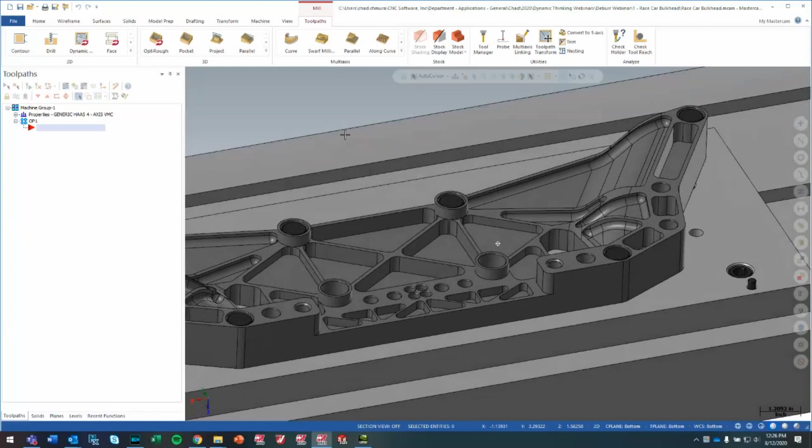This is a race car bulkhead for rear suspension of a race car. So this part is kind of a lightweight airframe structured part where naturally there's going to be a lot of sharp edges that need to be deburred at the end of this process. And deburring really any part, it's time consuming. It's a leading cause of scrap.

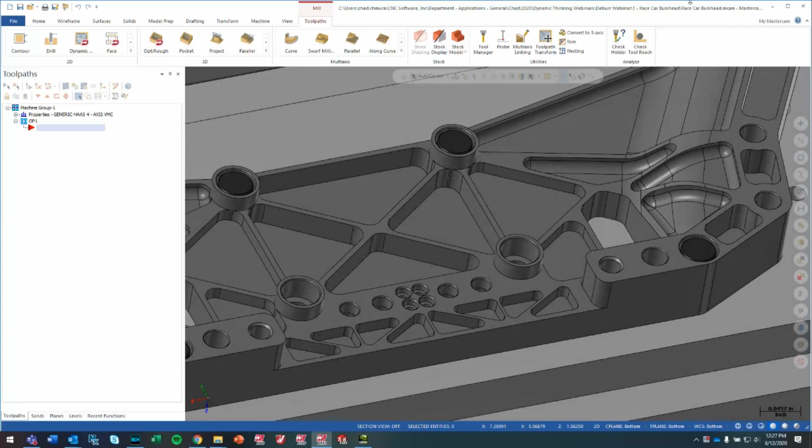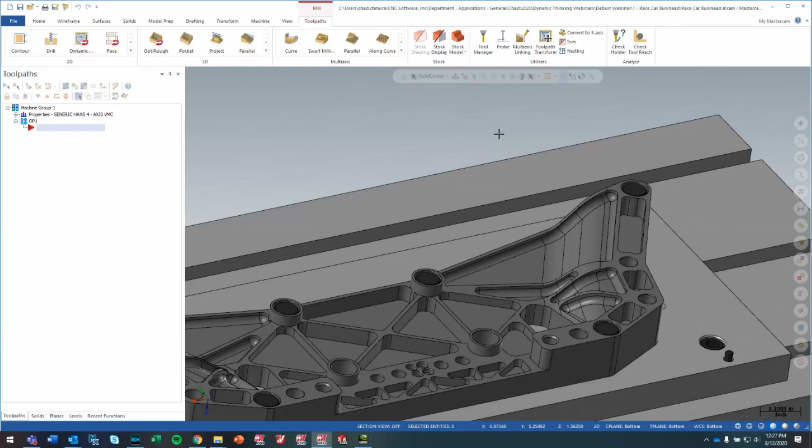Anytime you have a human hand touching a part, the human hand is going to be inconsistent. The break edges will be different each time. And depending on how bad the part is, deburring these parts could actually be just dangerous. These sharp edges are not something you really want to be rubbing your hands along if you don't need to. So what Mastercam Deburr offers is a solution for breaking these edges.

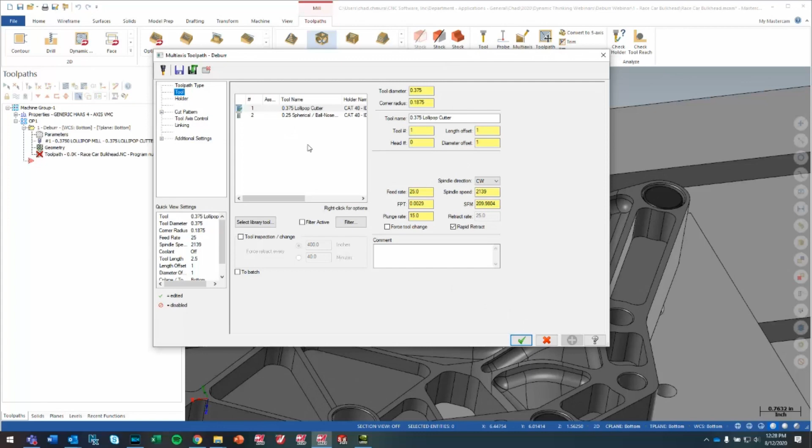So we'll build a quick Deburr toolpath just to show you what it's all about. So under the multi-axis drop down, there is the deburr. And what this toolpath is looking for is a spherical tool. So it needs to be a ball or a lollipop mill. We can't use a chamfer mill for this because that would be a chamfer as opposed to a deburr operation.

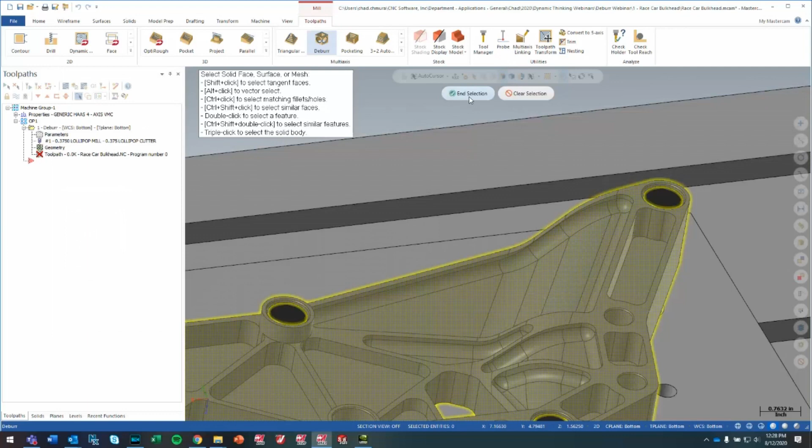The really cool thing about this toolpath is how little it requires to get going and how really complex the results can be. The first thing we have to do is select our part surfaces. So what I can just do is triple click to select the entire body and End Selection. And then by default, the Deburr toolpath is going to detect every sharp edge on this part.

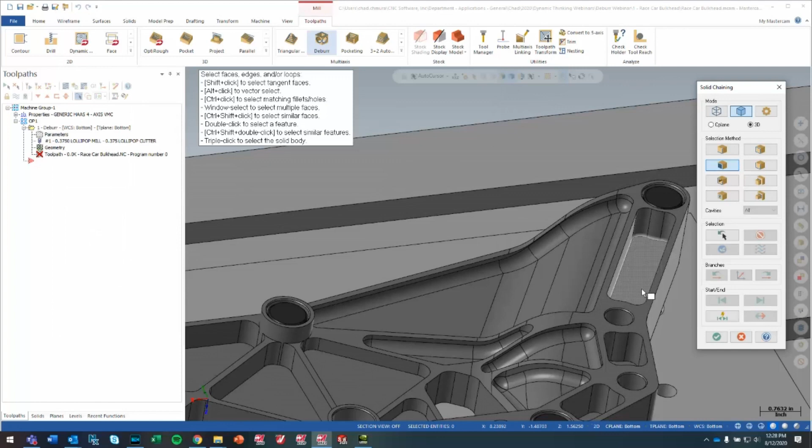And we have the option to exclude edges. So basically we say, oh, I don't want to deburr the edge where this bolt head is because we're not going to be able to reach that hole. So instead, for this case, we'll do a user-defined edge just so we can deburr one single edge. And if we just do a shift click here, we're going to get a chain that wraps around the entire length of this pocket. So this is a very simple pocket that needs to be deburred. So this is a very good first example.

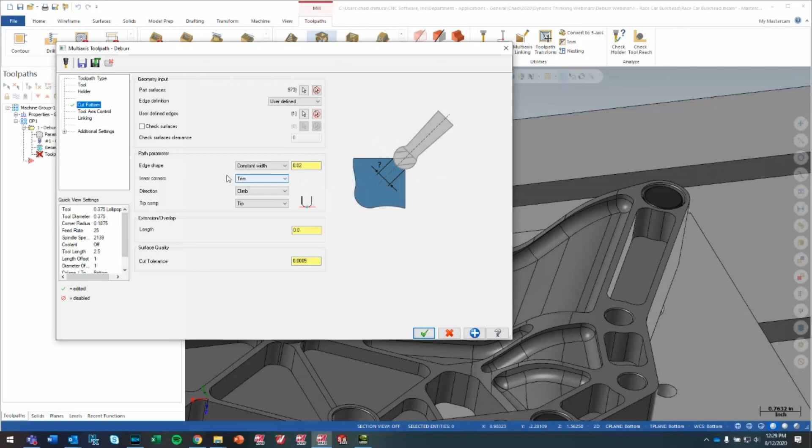We enter our width or our depth of the break edge that we're targeting here. So this is 20 thousandths, this is an inch part, so it's a pretty heavy break edge. The real power here is with tool axis control. So right now this is set up for a 3-axis machine. We have all sorts of options for running this with multi-axis machines.

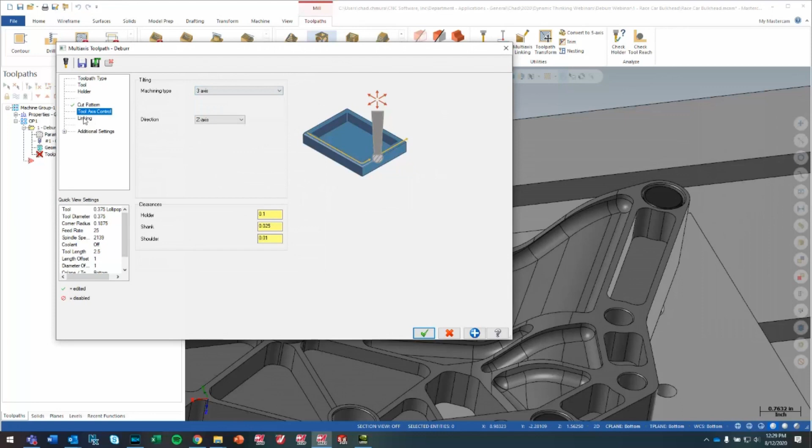And then finally, we have some options for setting up some linking parameters and things. But right now, we're just going to leave all this as entirely default. So let's generate this with the default parameters. So really, I only entered, and I didn't even enter it, I left it default, but the break edge size. All we had to do was select surfaces and edges to deburr.

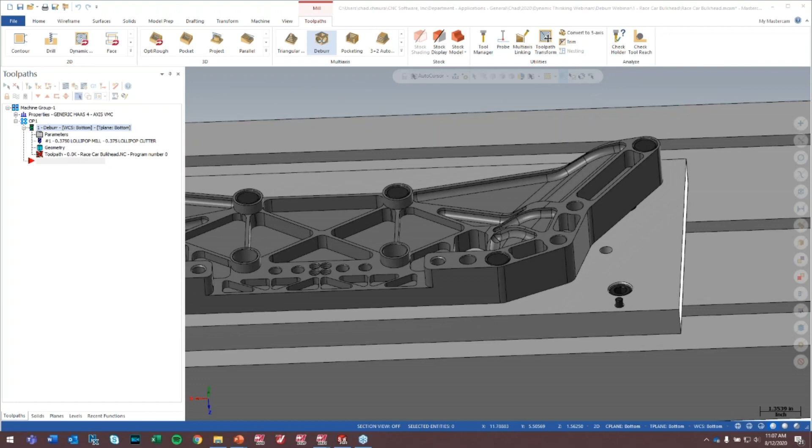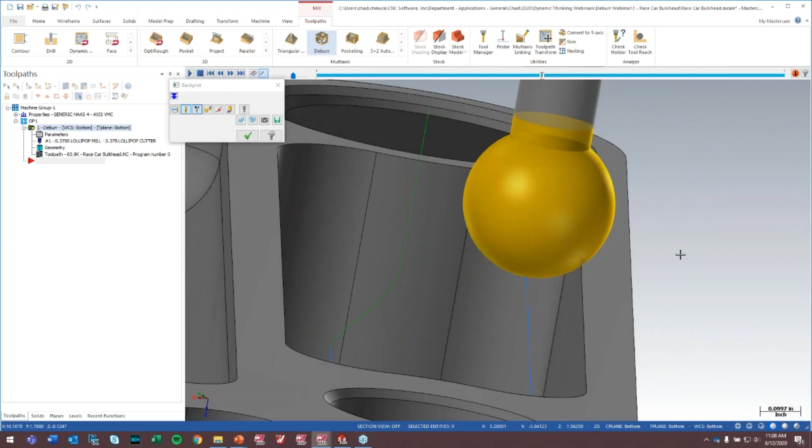So the point of selecting the surfaces is that this toolpath is consistently checked for collisions. And so what that means is that no matter what you do, you will not find a gouge in your part. You will just have a good deburr toolpath, super smooth, very predictable, and you will not gouge your part. As we'll see in one of these next passes that I create, this toolpath is intelligent enough to avoid any surfaces that are not requiring deburring.

So we can see here inside the tool that we're just taking a nice 20 thousandths break edge, and we come off the part and retract to our default linking parameters, which ended up a little bit high, but that's okay. We can dial that in as we go. And this right here you could have done with a simple 2-axis contour toolpath.

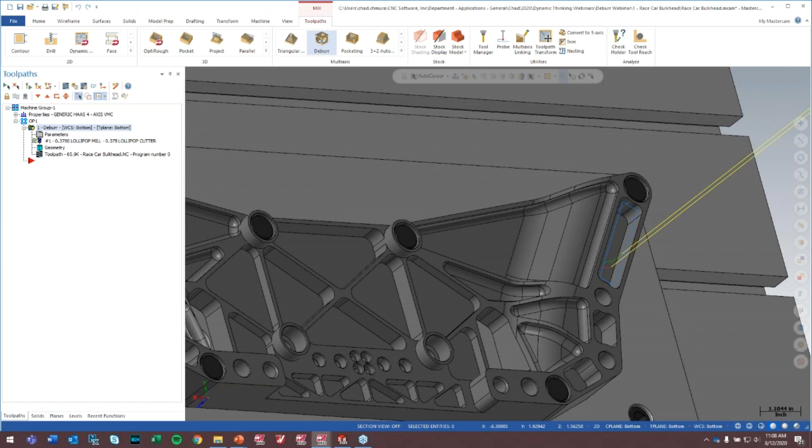If I just copy this toolpath down, just to save some time on selection, now let's do a different edge. Let's unselect this first edge. And now we'll select one that's a little bit more complicated. Again, shift click, we'll find all the tangent edges.

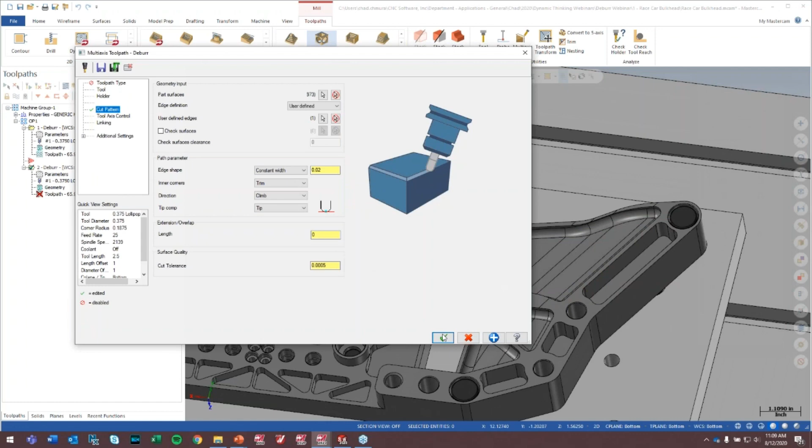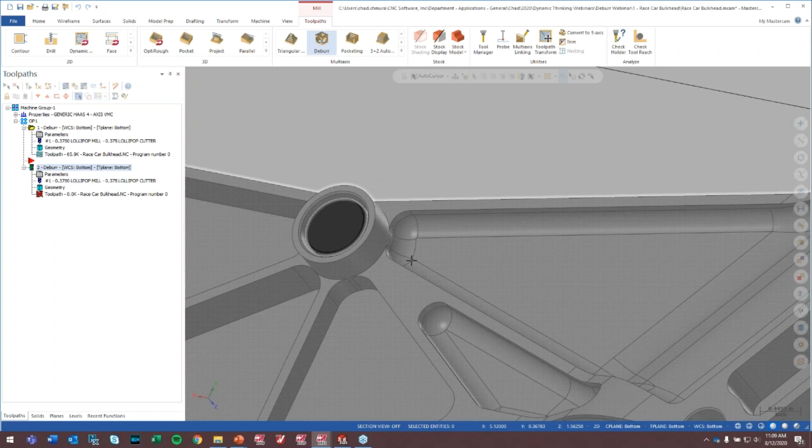And you'll note that this one is basically going to end tangent to a face that doesn't require a deburr, right? So this cylinder that sticks up is something that we don't want the tool to interfere with. So once this finishes generating here, and now this is still a 3-axis toolpath, and we're still using a lollipop mill.

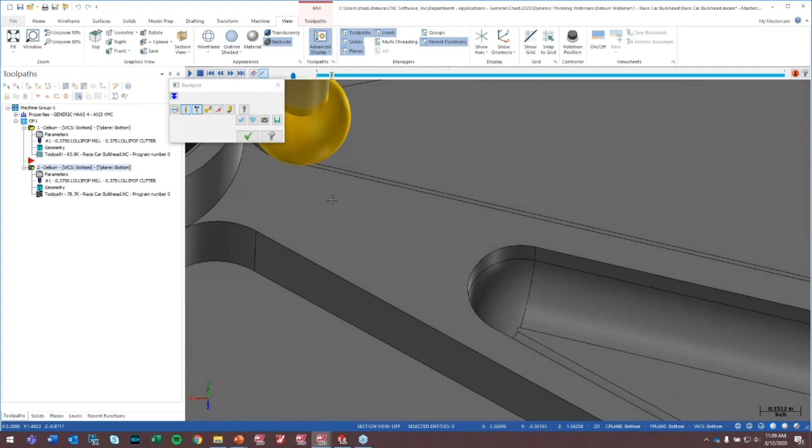So what we're going to do once this is done generating is change the tool up a little bit, just to show some of the collision checking capabilities that we have here. So this toolpath comes in, just misses that surface, and immediately gets into deburring. So now it's a 3-axis toolpath, right? So this is something that you couldn't really do with a contour as you approach over these more complicated edges here. And again, come off the part with a nice retract.

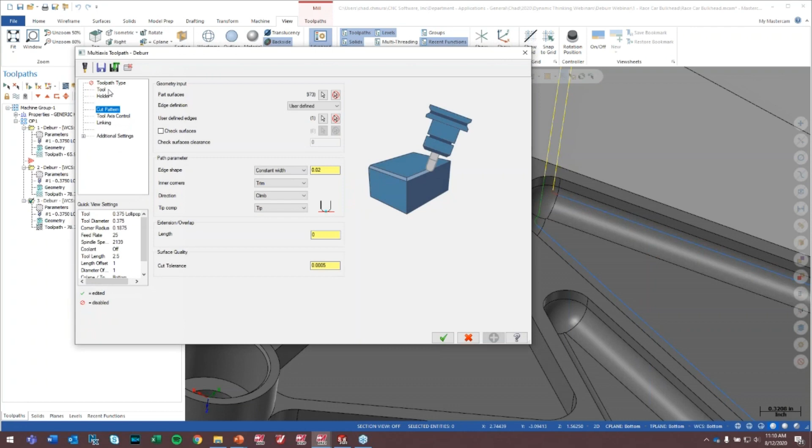And again, just for the sake of comparing, we'll copy one more time. Let's say we don't have a lollipop mill. Let's say we actually have this ball end mill, which has an increased shank diameter relative to the cutting diameter. Change that tool and leave everything else the same. What we're going to see is the shank of that tool needs to be collision checked against the cylinder that's standing up. So as we regenerate this toolpath, what we're looking for is that the shank of the cutter is going to miss this area.

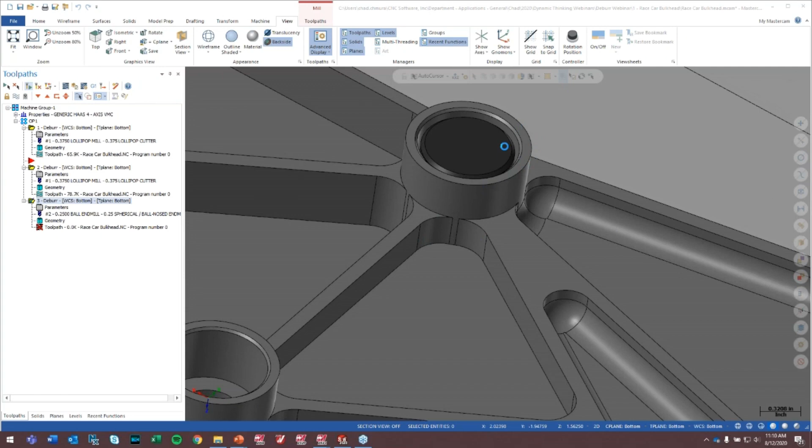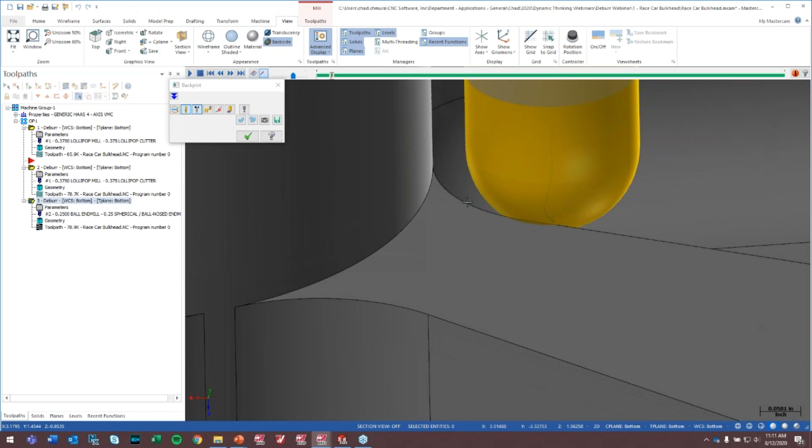And so while this is going, we'll mention the next step of this is that we are going to add a little bit of multi-axis tilt, because with an increased shank diameter, we need the tool to stay away from this feature, which means we're not able to deburr all the way to the end of this part, right? Right now we're obeying a value that was set in our toolpath, maybe something like 20 thousandths of an inch or so of a collision checking distance between the shank of the tool and the feature that stands up.

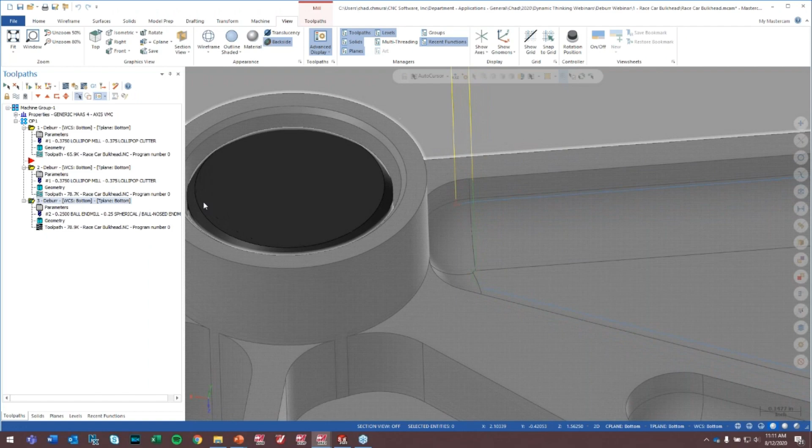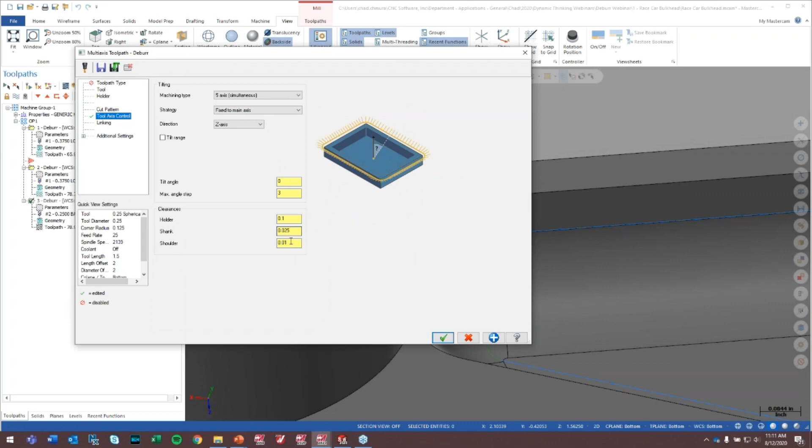And you can see the comparison between both of these toolpaths is that our new toolpath does not quite complete this break edge. So what we can do here is simply go into tool axis control if we have a machine that's capable of tilting, and switch to 5-axis mode. Right now we're going to keep the tool fixed to the main axis as long as possible. So this is going to make the tool stand up straight unless it has to tilt. Right now, as I mentioned, we have a 25 thousandths of an inch collision checking tolerance on the shank of the tool. So as this completes, we'll regenerate this.

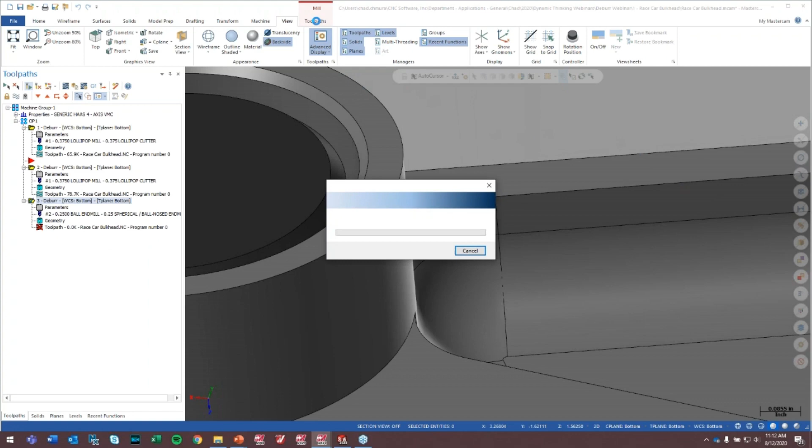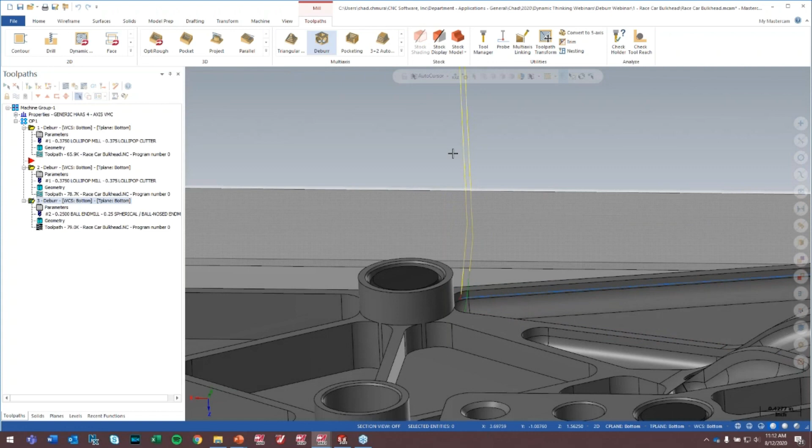It actually looks like we do have a question here. So we're inside of the multi-axis toolpath gallery here. The first question is, is this toolpath available for users who have a traditional mill license? And currently that is not possible. This toolpath, even though up until this one I've been running with a 3-axis tool axis control, is still a multi-axis toolpath that requires a multi-axis license to use. So it doesn't need to be run on a multi-axis machine, but your Mastercam license does need to be multi-axis.

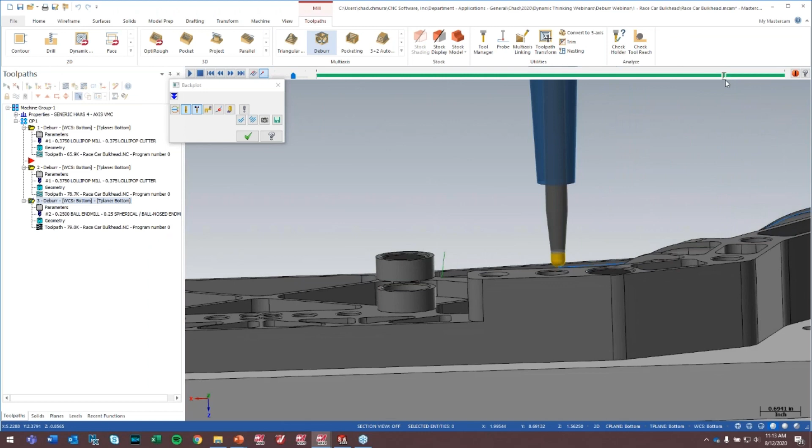So if we look at how this tool approaches now with 5-axis mode, we get our tilt, a nice approach that keeps the shank of the tool away from the feature, and then it returns to straight as soon as it can, because this is our main axis that we want to remain fixed to. And then finally, the tool kicks over so that it is able to reach the very end of this chamfer. So again, if you have a 5-axis machine, you're able to get the most out of this toolpath.

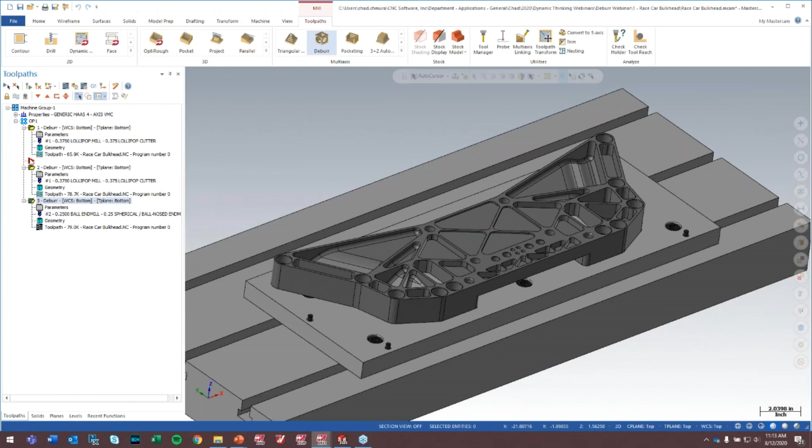Let's say, though, you don't have a 5-axis machine. So let's say here for our second operation, we flip the part over on the table, and we're now going to be using the top plane. Something that's really cool about the Deburr toolpath is the ability it has to create undercut deburrs. So now again, we'll go in with the lollipop tool, triple click to select the entire part. And just for example, we're going to say we want to define a single edge right here that we're going to deburr.

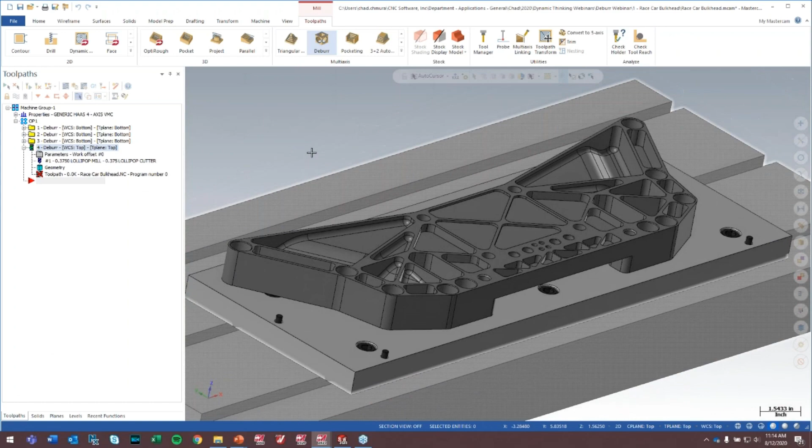And I should just make sure that this is going to run in 3-axis. A little bit too late, so we may see a multi-axis version first, which will still be entirely functional. But I just want to show the ability here of this toolpath to run with 3-axis undercutting, because for somebody who just has a 3-axis machine, deburring a feature like this from above was never really possible. Not that it wasn't possible, it took a lot more work than what we're about to see here.

So 3-axis, let's just do a quick regenerate on this. So that was a 5-axis toolpath, which meant it was doing a little bit of tilting. So that's something that we wanted to try to stay away from for this one specific case.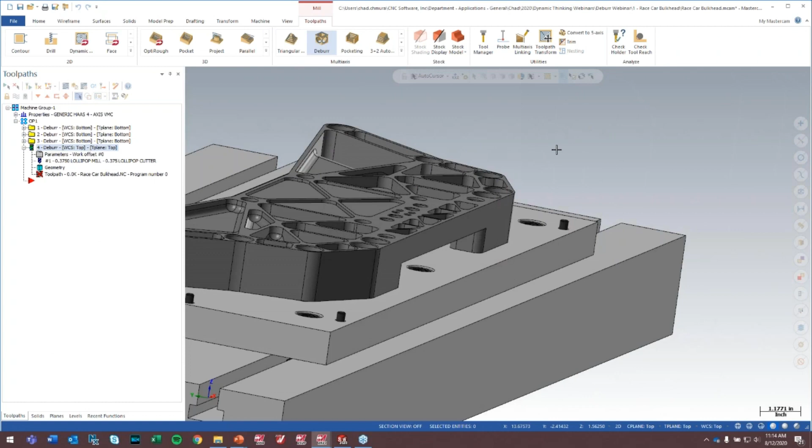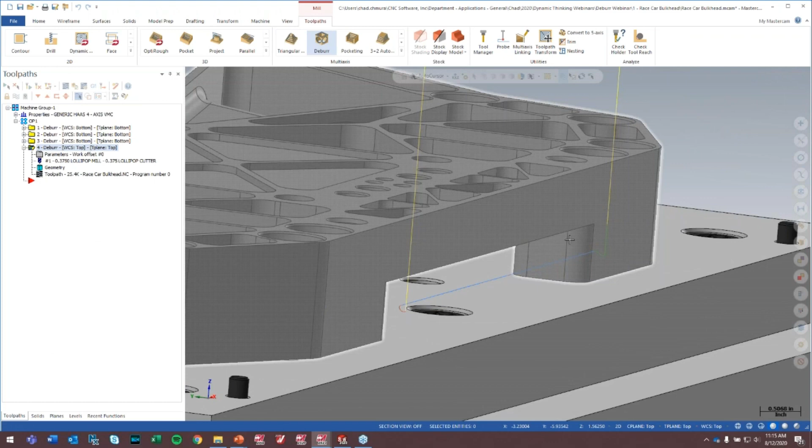So as this regenerates, one strategy that we could actually employ here, and the reason why this is taking so long to generate: selecting the entire body is maybe not the most optimal thing, because essentially that means that the tool is being collision checked against surfaces that are way out here. The really smart thing to do would be to select all the local surfaces. That way you collision check against surfaces that are nearby and save yourself a lot of time toolpath generation wise, not collision checking against unimportant surfaces.

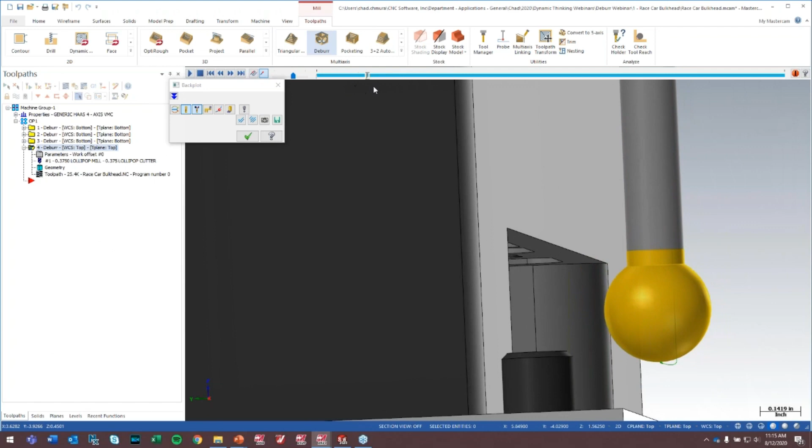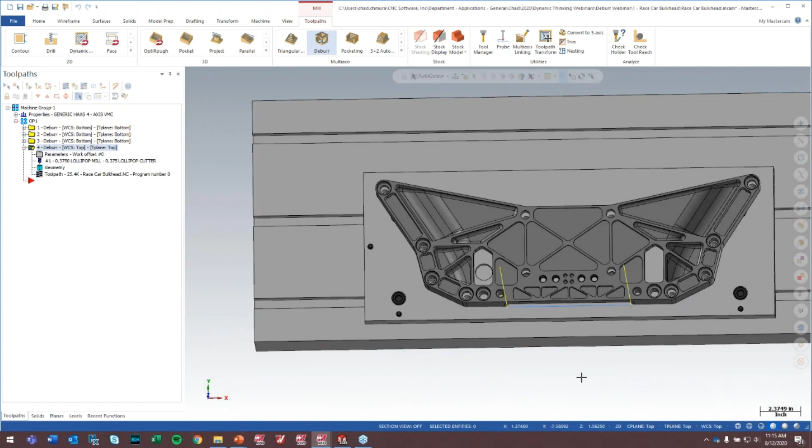So here we see this super easy to create undercut back burr with the lollipop tool with a safe entry into material, safe exit off, and then the tool is able to retract up and away. So we actually were able to deburr this entire part with one operation per setup. So basically with this setup here, we would deburr every single sharp edge that is on the top of the part, flip the part over, do the secondary operations, and then deburr that whole entire side.

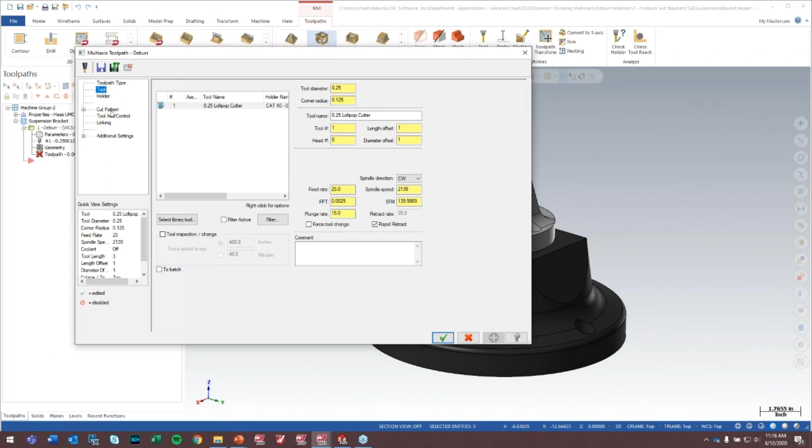So let's say we have a case now where we've got a part on a dovetail fixture in a multi-axis machine, and we want to deburr this in one shot. So let's go deburr. We have, again, a lollipop tool here. Now, this is actually a part that we make for a Formula SAE team, and we make it every year. So the first year that we were able to introduce the Deburr Toolpath, the quality of this part increased immensely, because we would never deburr the holes where this drill feature goes through all these individual profiles. We would never deburr those. Those would be like a little hand file thing.

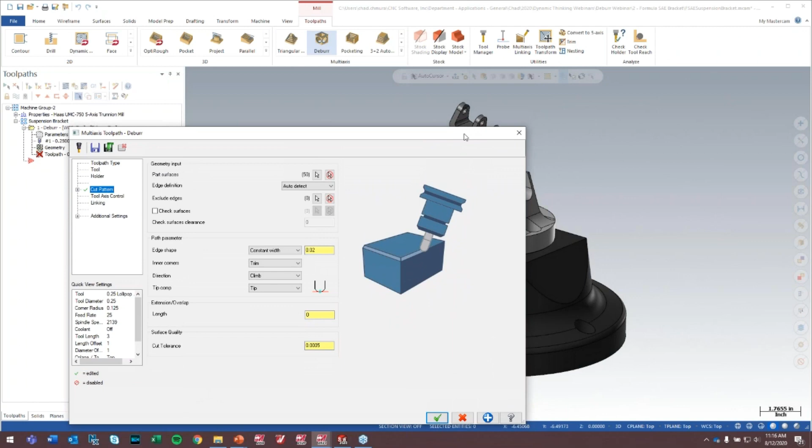So now with the Deburr Toolpath, I can come in and say, okay, I want to auto detect, just deburr everything. I just want to exclude everything on this bottom face, right? I don't want to deburr any of those because those edges are a bit of a reach. Everything else though, every sharp edge, I would like to be deburred.

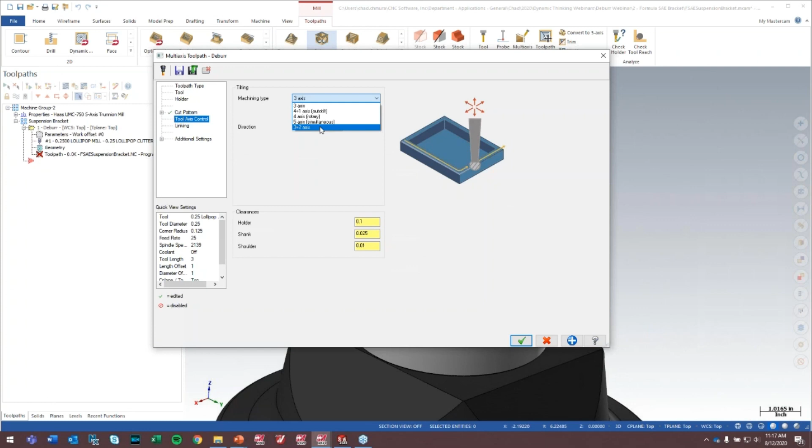Another option that we have is 3+2 axis. So 5-axis simultaneous is going to allow for a lot of multi-axis motion, which is really cool. It's great for getting into difficult places, but the motion is pretty complex. And as a rule, with a 5-axis machine, we don't want to move any more axes than we need. So 3+2 axis, what this is going to do is basically lock to an orientation for as long as it can and deburr as much as it can before repositioning it in maybe a different orientation. So again, we'll leave all our linking default.

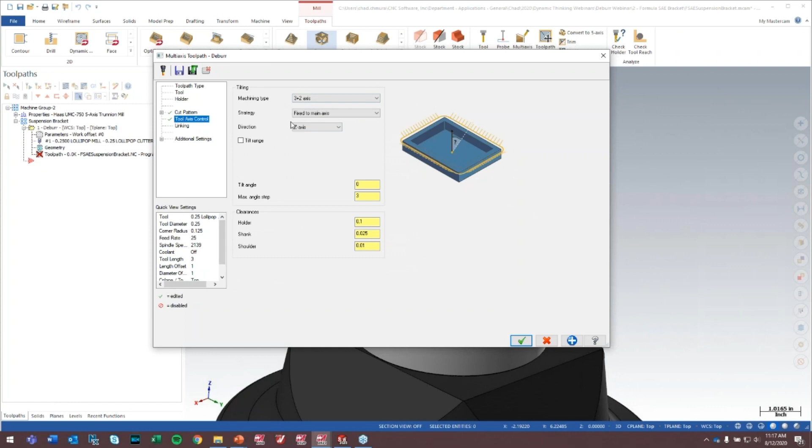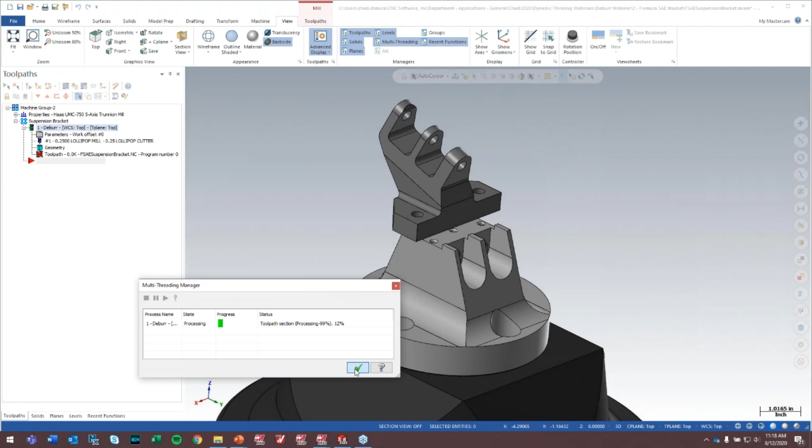So I just want to reiterate just how simple this process was. We really only have to say we want 3+2 axis, deburr this part, avoid these edges, and this is the width of my deburr toolpath. And this one may take a second or two longer because we are actually deburring everything. So let's pull up our multi-threading manager just to make sure that things are moving. Seems to be. And as I mentioned before, we would never reach inside of these edges. And the first time that we did this, we were able to get all those edges deburred, and these parts came off looking really nice.

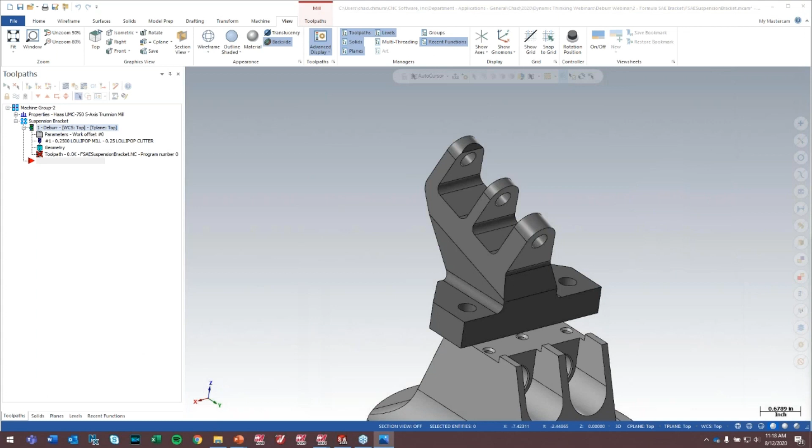So we actually have one more part I'm going to show you quickly, just to show you what the actual output of a toolpath like this is. It really cleans up a part, and it gets rid of those inconsistencies that are created by a human hand touching your part. And actually, while this is generating, let me just pop the image up here that I'm talking about. This is a different part, but it's not going to show, is it? Mastercam's taking up all my power. Well, we'll let this toolpath finish generating and then show that picture.

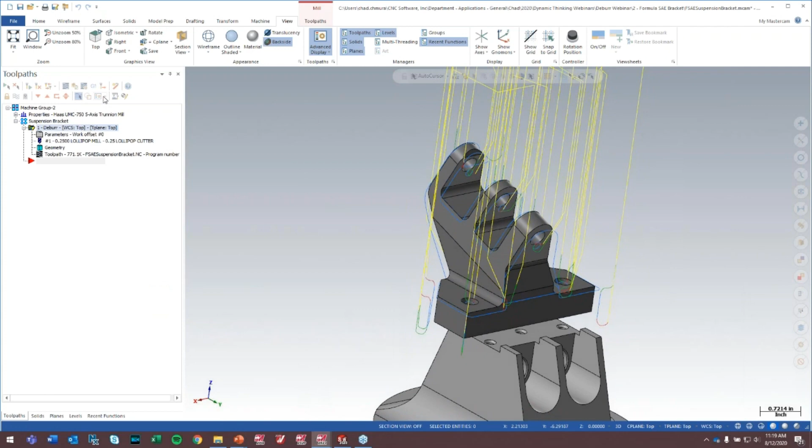It did generate a little quicker than this before, and I just realized I didn't set, one thing this toolpath does have is tilt limits, so we can say we want to keep this thing tilted between 0 degrees and 45 degrees or something like that. So it looks like we were given something pretty good. Let's just hide some of these retracts. It looks like we have a pretty nice deburr here, which was maybe a 2-minute generation time.

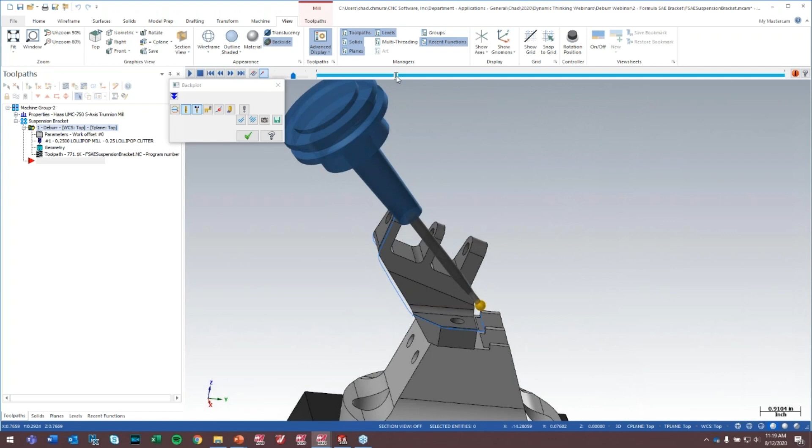And what we're going to have here is a toolpath that you can see here. It finds an orientation, stays 3-axis for as long as it can. It even gets down underneath this edge here. Finds a new orientation, finds a new orientation, and every single edge is deburred. Even here, we've got a little bit of an undercut, but we're still creating that nice 20 thousandths break edge without any gouges.

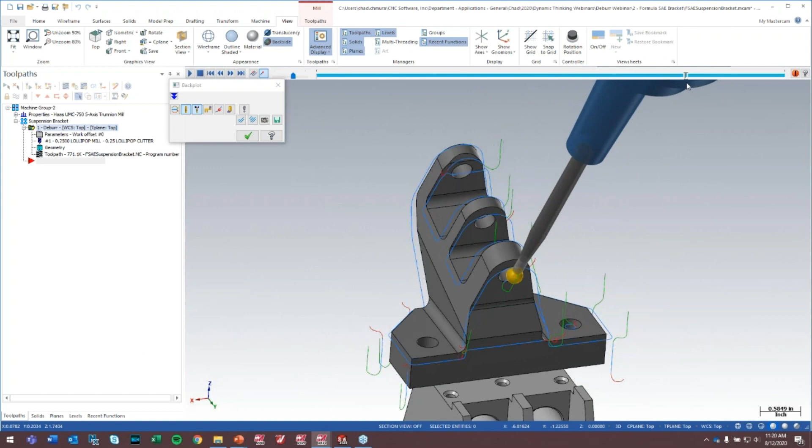And of course, for me, the most important part is once we get into these, we can deburr the ins and outs of all of these holes, where before we would have to make false geometry with the multi-axis toolpath and really kind of trick Mastercam into breaking these edges. So this toolpath has absolutely changed the way that we make this part, and the quality of this part has become something to be much more proud of.

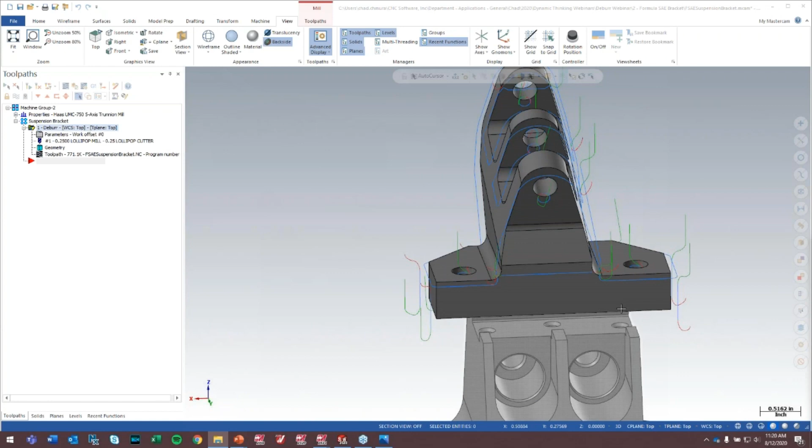So actually, here's the image I was trying to show before. So this is an optical mount. This part was done in stainless 17-4. And this was a much smaller break edge than what we're showing in these parts here. But these break edges are all just enough to get the sharp points off, and really just enough to kind of clean up your part and basically help you to maybe complete a part in a single setup, take that part off the machine and have something that's entirely finished and not in need of any post-processing whatsoever.

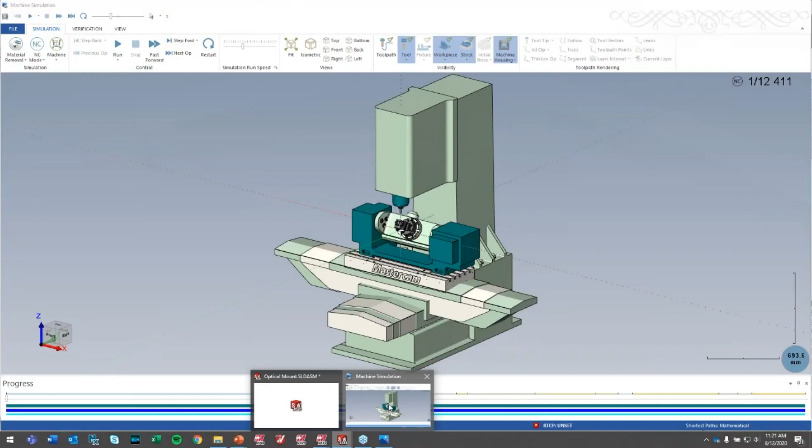So this part was cut actually in Mastercam for SOLIDWORKS, and I just want to open up the machine simulation for this quick, just to show a little bit more of how this motion looks at the machine. This is probably going to be a little bit choppy for you guys viewing. The GoToWebinar is going to be a little bit rough, but you'll see the motion anyway here. This was done with full 5-axis mode turned on. So we can see the 5-axis tilt simultaneous, creating just this beautiful little break edge everywhere.

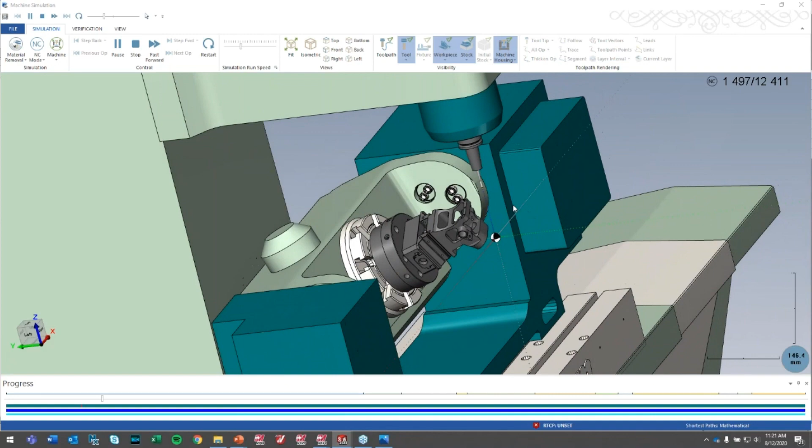And this part we actually ran, we had just picked up a brand new Makino 5-axis machine in our shop. And this was the first part that I had ever cut on the machine. We had brand new tool holders, brand new everything, tools. This was all an Emuge partnership, so these are all Emuge tools. And the Deburr Toolpath worked flawlessly, but there are some areas of this that were a little bit scary, just because, in order to reach some of these features, the tool had to really get in deep.

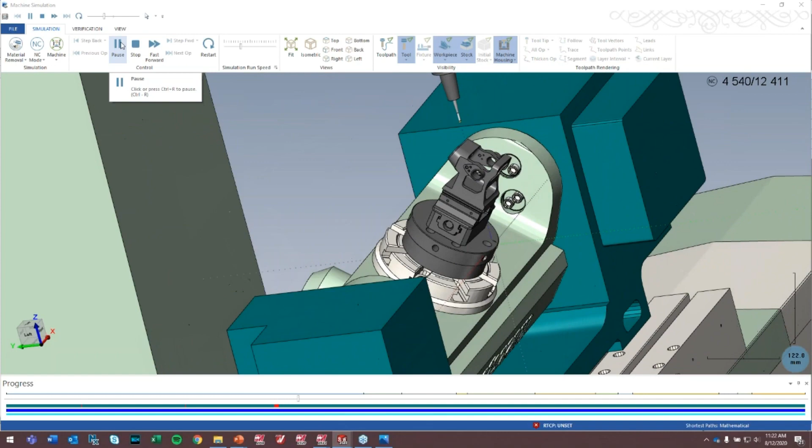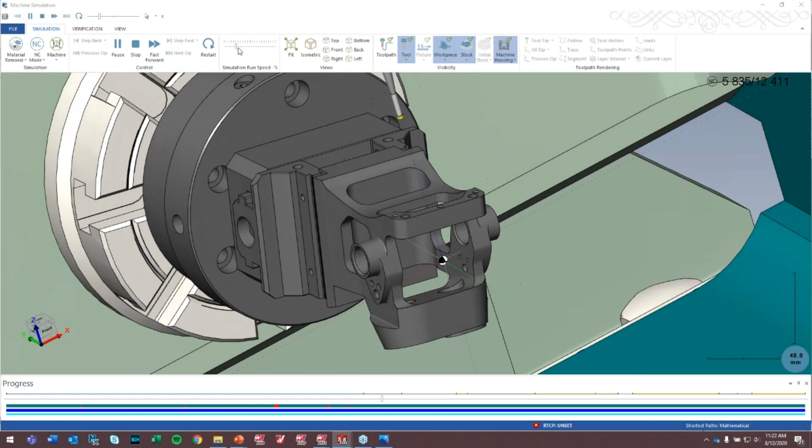I'm not sure how far away from those features we are here with the machine simulation. Should be coming up relatively soon here. We're going to see the tool holder actually dip right inside. Here we go. Here's one of the scary parts. But it always avoids those surfaces. And we were able to deburr the back sides of these holes through the part without any intersections anywhere. There's no gouges. We ran this with 100% rapid, and it was scary, but it worked beautifully.

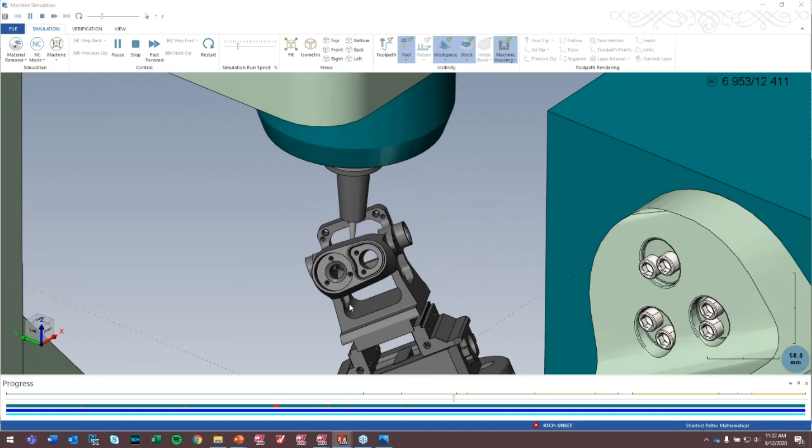So here's another one where we're down inside the part. And I don't know even any human who could deburr this edge consistently. And yet here we are with the Makino getting beautiful 5-axis deburr motion. So this Mastercam Deburr Toolpath is an extremely powerful tool for getting finished parts off your machine in essentially one clean, easy setup. And really, that's about as much as I wanted to show as far as technical content here. I'm kind of hitting my time limit.

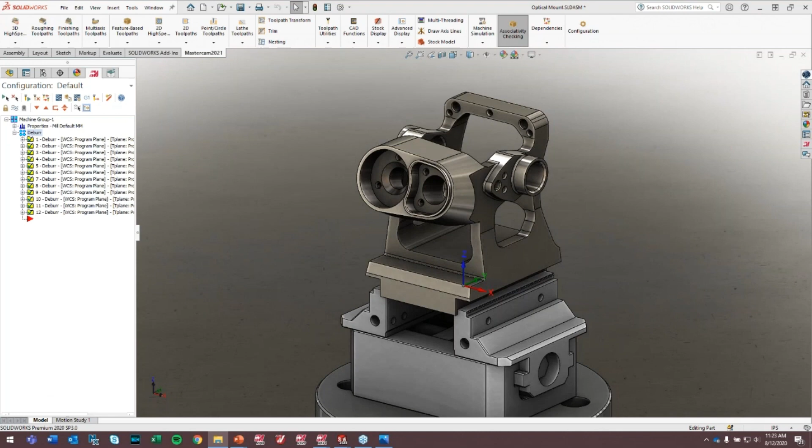We have one question here. Are we able to deburr a part in a single operation? And yeah, we just did that over here, where really this whole part, as long as you can access it, you can deburr every single edge of this thing in one operation, where before, this may have been 15 operations that you had to create some sort of fancy trickery to make a deburr toolpath. So yeah, you can absolutely get the whole part in one go.